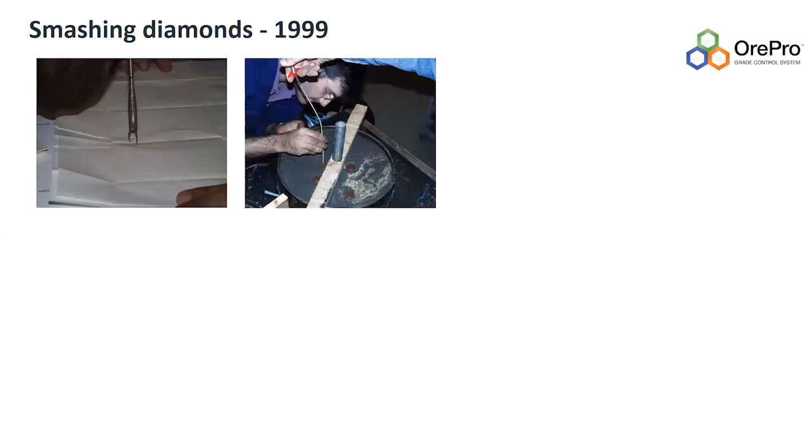Some of the interesting things we did here: in 1999, we had a diamond damage project with De Beers, where basically we took 24, I think they're 1 carat, half a carat diamonds, gem grade diamonds, and we stuck them in concrete. There's Gideon doing some work. We put the concrete in drums with a little explosive charge, and we were supposed to get nice shock waves to see whether or not the diamonds would be damaged by the explosives.

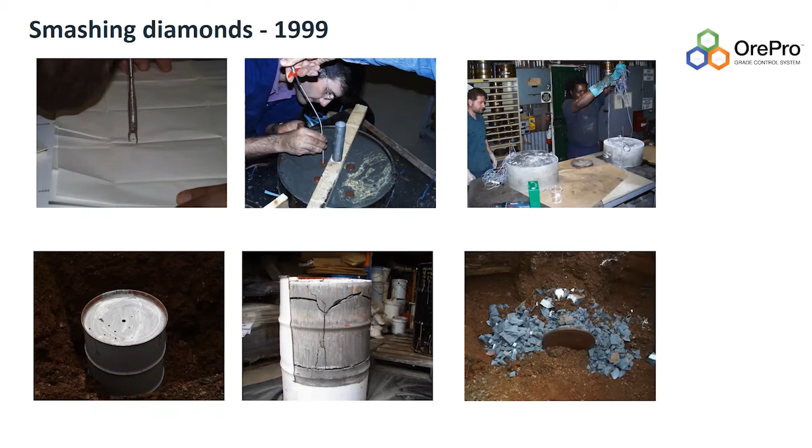Sometimes the drums didn't behave, and so we had to dig through and find them. And luckily, we didn't lose any of the diamonds. We were told in no uncertain terms not to lose any, so that was quite nerve-wracking. And that's basically what we ended up with. So we had diamonds that sometimes survived, other times we never cracked them, but we got a number that just shattered internally.

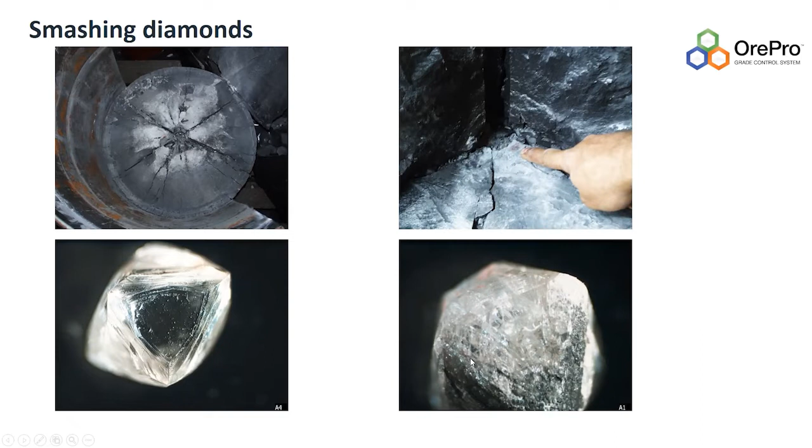So the start of the grade control journey for me was in the late 90s. There was a growing awareness in the industry that something wasn't right, that what people knew was in the ground wasn't manifesting itself at the end of the concentrator. So there was lots of work done globally.

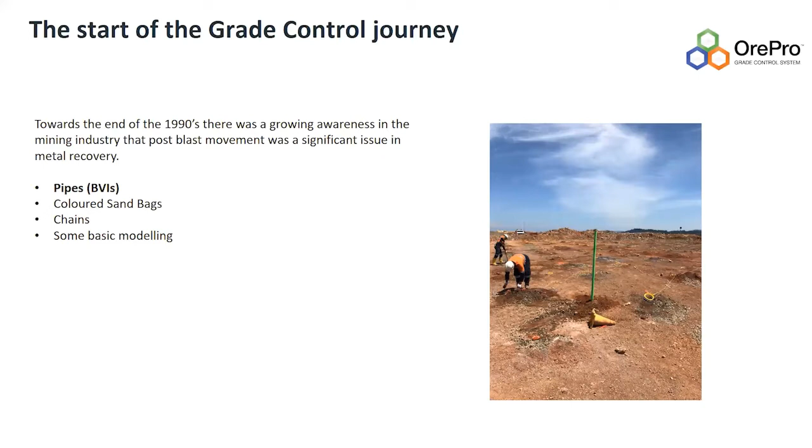Using pipes and coloured sandbags and chains and some basic modelling. At the end, it came back to blast vector indicators, BVIs, which are polypipes, which have issues in recovery and also accuracy. You end up with a 3-metre pole where on that point is the end point of your vector.

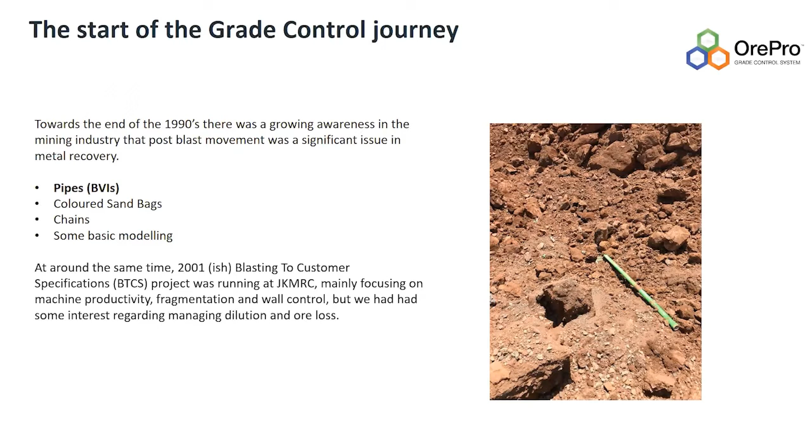At the same time, we had a project in the mining group, blasting to customer specifications, BTCS, and that was mainly focused on machine productivity and fragmentation and wall control. But there was interest in trying to tackle this dilution and ore loss issue that was plaguing the industry. So the light bulb moment was in April 2001.

Darren Thornton, who was working here at the time, showed me this paper where the Mackay School of Mines in Reno were doing some work where they had magnets in the ground. Pre-blast, they would go with a cesium vapor gradiometer, it's a magnetic detector, and pick up the vertical component of the magnetic field. So you end up with these little volcanoes of magnetic field. So that shows you where the magnets were pre-blast.

And if you remember your high school magnetic theory, there's a dipole, and so that's all good. But then post-blast, you get something that looks like that. So what's happened? Obviously, with the blast, the magnets are rolled, and the magnetic field isn't always pointing vertically. So that night, I went home and I pondered it, and the next day I came back. I remember it fairly clearly. It's quite surprising. I said, what if we gimbaled that magnetic field so that the magnetic field was always vertical?

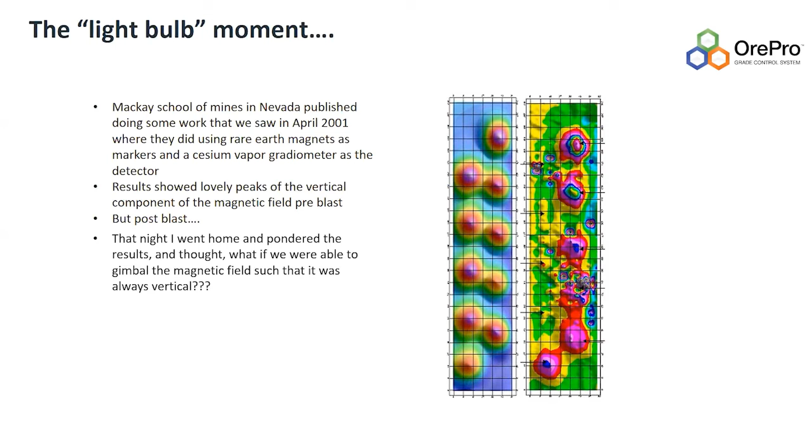So the JK Skunkworks kicked in down there, and that was Michael Wortley, Graham Sheridan, myself, Peter Holtham, and also Darren Thornton. And we kicked in, we built a prototype.

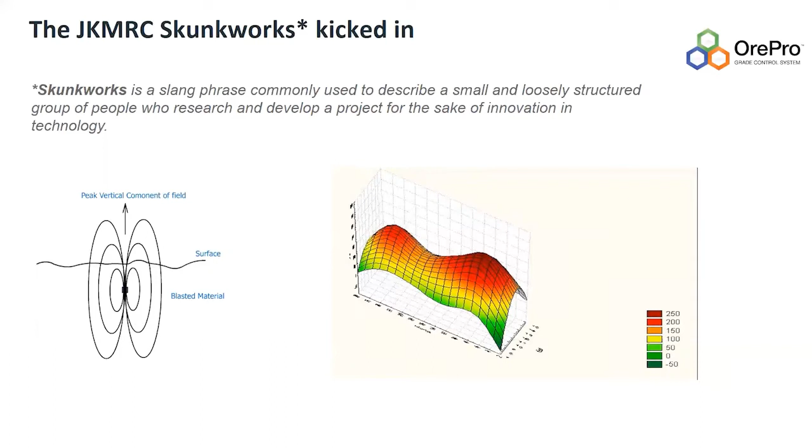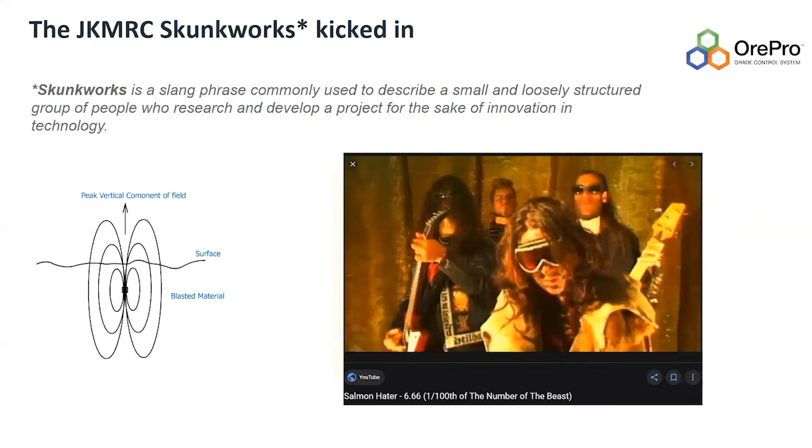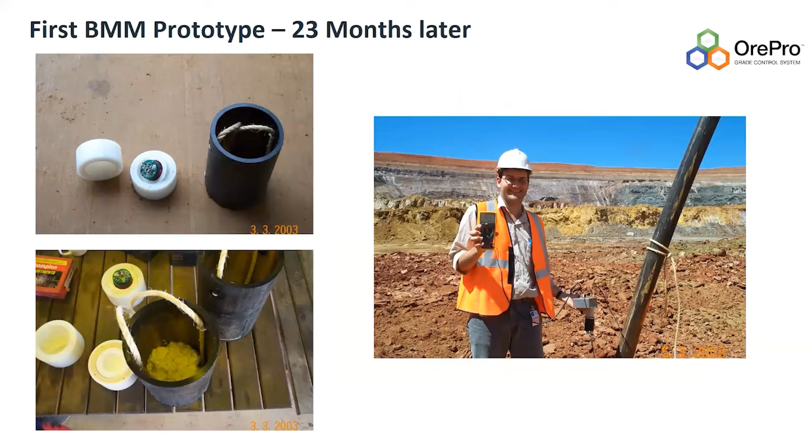So 23 months later, we came up with this prototype. This is at Sunrise Dam, and there's me with a big grin on my face when the two survived. Nick, who's here, he machined the first housings. There's a little polystyrene ball there that I bought from Spotlight, and we sort of MacGyvered it all together. But they worked, and we found them post-blast and created these vectors. And the rest is history for BMT.

So 250,000 of the balls have been used around the globe, and they're pretty well known throughout the mining industry in grade control space. So as Nathan said, I'd forgotten I'd given you all that. I then subsequently left, went to Metso Process Technology for 7 years, did lots of mine-to-mill stuff, developed smart tags, which are RFID tags, again, tracking ore post-blast through the concentrator. Did some vision systems and acoustic systems.

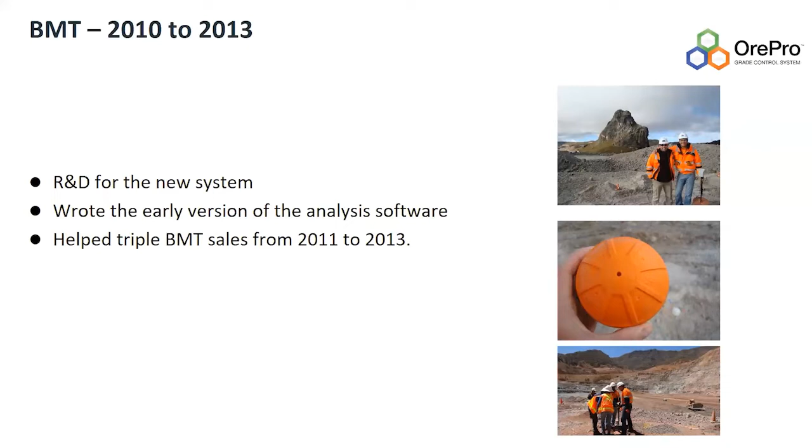Then went back to BMT, which was growing then. So I spent 3 years at BMT doing R&D. I wrote the early version of the analysis software. Some would say in an ad hoc fashion, but it was fit for purpose. And actually in 2012, we won the I Awards, both in Queensland and nationally, for the industrial design of software. So that was pretty cool. And we also tripled the BMT sales in that period. I then went back to Metso, as you do, and did some more stuff.

That imploded in 2015, and so then I ended up at CRC, where that's my day job, doing blast modelling in the grade engineering space for induced and natural deportment. Also looking at mine-to-mill studies and using the capabilities of the integrated extraction simulator with the blast fragmentation model, and also doing some data analytics to look at correlations between the sensors that we're evaluating and the origins of the ore, again, looking at ore tracking.

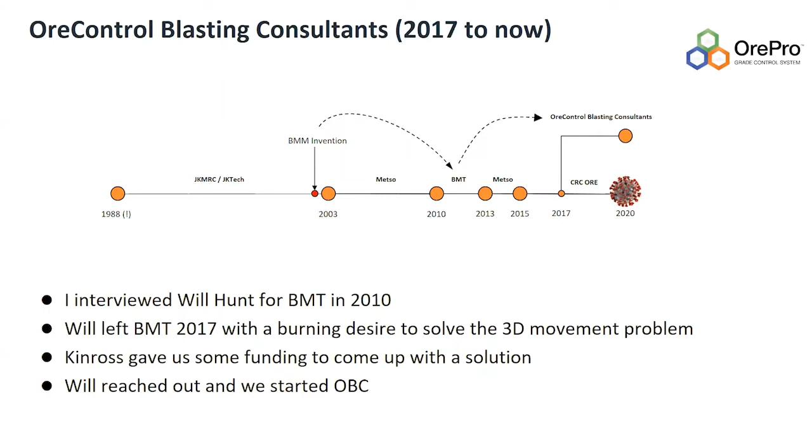In 2017, sorry, I'll step back a bit. So in 2010, I interviewed Will Hunt, who's my co-owner of OBC, and he started at BMT, and then I left. And Will left BMT in 2017 with this understanding that there's a 3D issue in grade control and with a burning desire to sort of solve it. He had got some funding from Kinross, and he reached out to me, and I checked it with CRC, and we started OBC.

So yeah, Will's a mining engineer. He's based in Denver. He's done a lot of consulting around the globe. Our CTO is Jeff, very clever software engineer. Had nothing to do with mining, which is probably a good thing.

And yeah, has done a fantastic job with what I'm about to show you. So let's go back to grade control. So grade control 101. So you have a blast block. You do lots of assays and blast hole sampling. You do some magic geostatistics, and you create a grade control model. And that's used to classify ore and waste, and uses the grade, the geochemistry, lithology, etc.

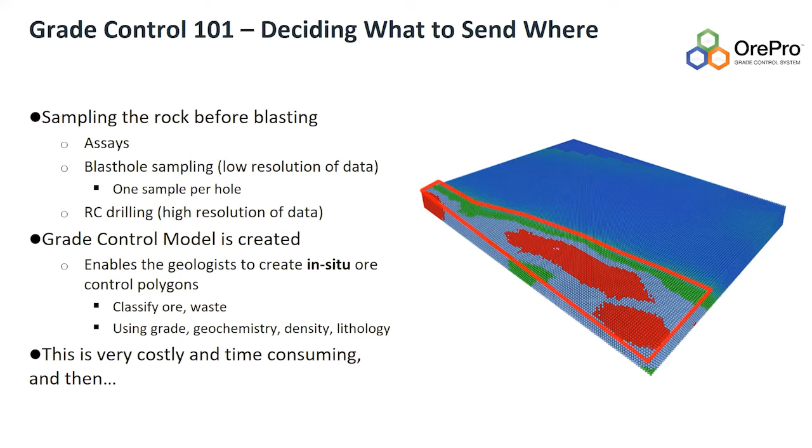This costs a lot of money. It's very costly and time consuming. And then we do this. We blast it, obviously, to excavate and process it. So if we look at this blast here, these are pre-splits, so it creates a crack along the high wall there, just to protect it from damage. It doesn't really contribute to movement at all. This blast is going to initiate here and fire in a V shape.

Drones have made our life much more interesting, and allow us to see things that we couldn't see before. So there you can see some fly rock coming to try to take us out. It doesn't, but if we go back, we can see the rock at the front kicking out, like so. So we go down to the ground now and look at this blast, and we look at this for scale. This is a 10-meter blast. You can see these two guys here, the scale. So, you know, it's a lot of movement.

A big power trough, or we call it power trough, at the back of the blast, big heave here. So ore has gone from here to there and kicked out there. And so when you're looking at mitigating for blast movement, obviously things aren't sliding in a nice 2D manner. Stuff is going down and up and everywhere and forward.

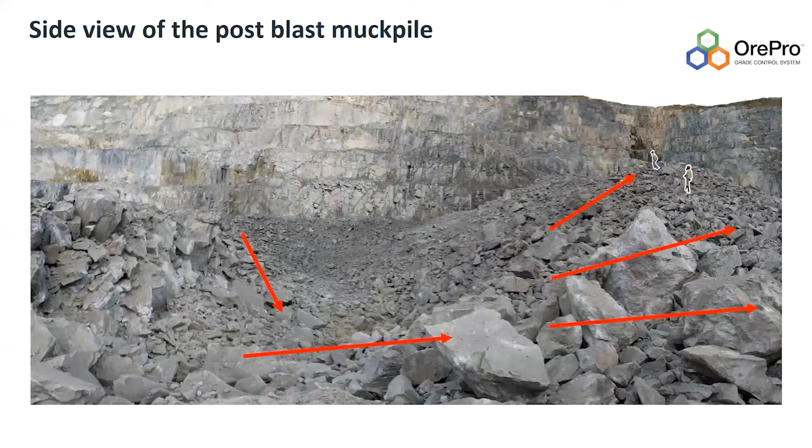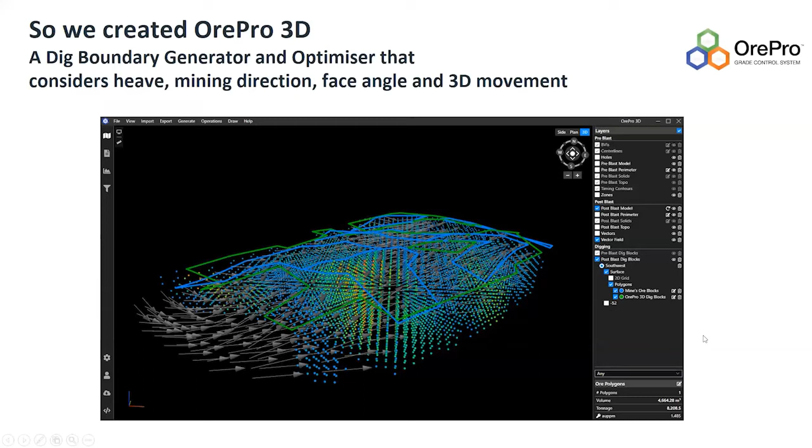So we created OrePro. It's a big jump. There was probably 18 months of software development there. And it does two things very well. It creates dig line boundaries to your specifications. So grade and minimum mining unit, which depends on the size of the equipment, mining direction, face angle, and of course the 3D movement. So we end up with, every time, it takes billions of calculations, the optimized polygons to capture the metal that you want.

So this is an example of comparing our polygons with hand-drawn ones. We gave this as an exercise to 4 geos. And you can see here, if we look at the dollar net, which is the metal minus the processing cost, you can see the great variation between the four geologists, and in terms of dollars difference between our polygons and the worst case is $96,000, and our polygon and the best one it's whatever, $70,000.

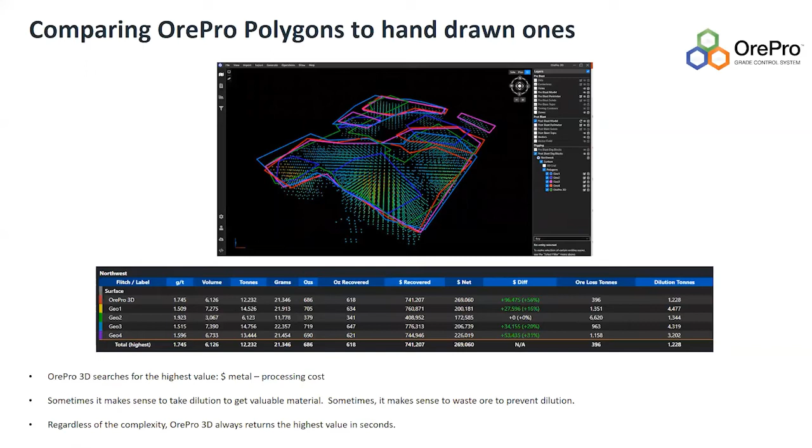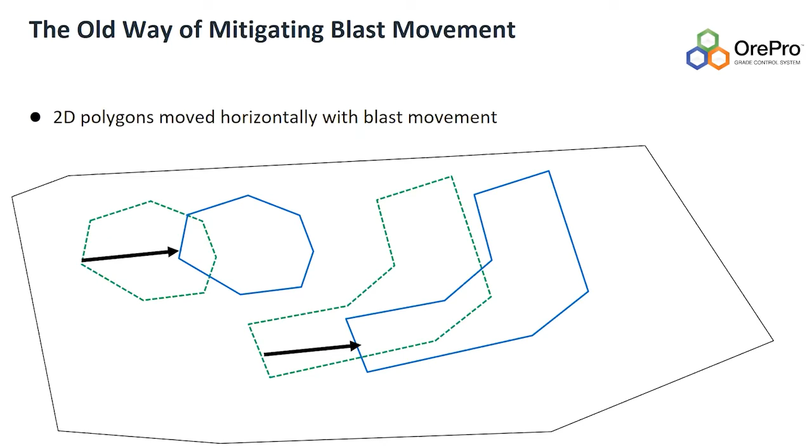So sometimes it makes sense to take dilution, which is rock which has got no metal in it. Other times you have to wear a bit of ore loss to get your maximum recovery. Regardless of that complexity, the system always gets the highest value every time. So once we've got our perfect polygons, what do we do with them to take blast movement into account? So the old way of mitigating for blast movement was to basically slide them horizontally. And I'll show you what that looks like in a moment.

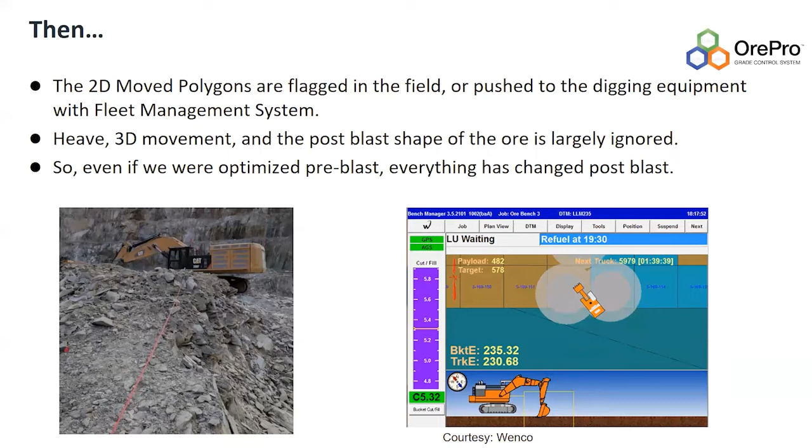So we take those 2D polygons and then we flag them in the field, and we push them to the digging equipment. But heave, which is how the blast swells, 3D movement and the shape of that post-blast muck pile is largely ignored. So even if everything was perfectly optimized pre-blast, everything has changed post-blast. So we look at a case study.

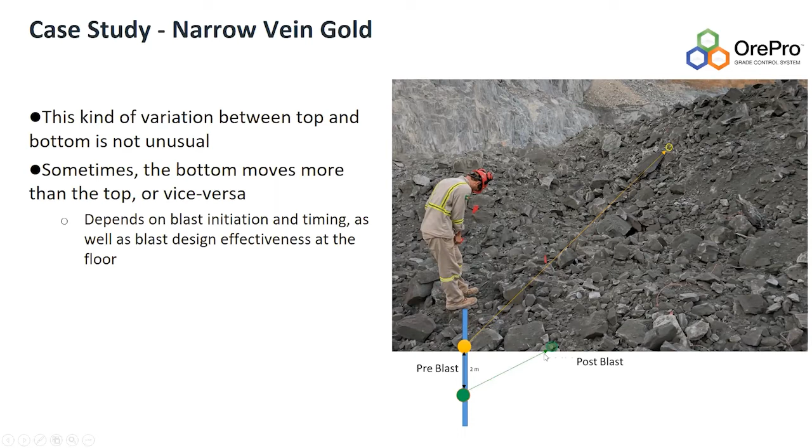So when this guy was standing, there were 2 blast movement monitors, BMMs, below him, and the top one, which is probably about 2 meters below his feet, moved all the way to there, and the bottom one moved to here. So sometimes the top one moves more, sometimes the top one moves less. It depends on the face conditions.

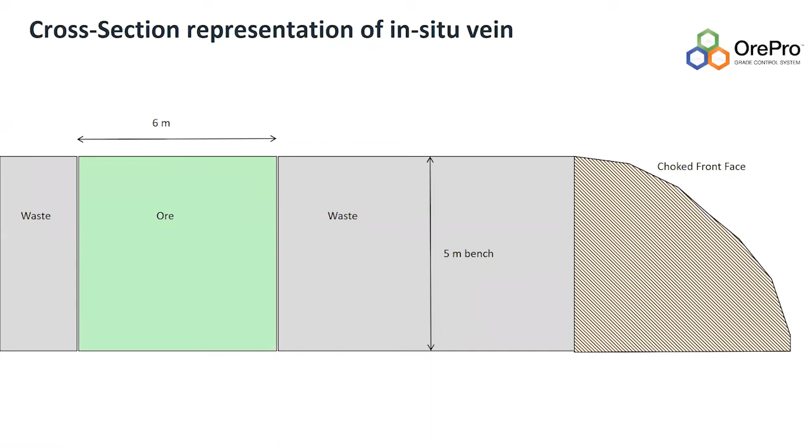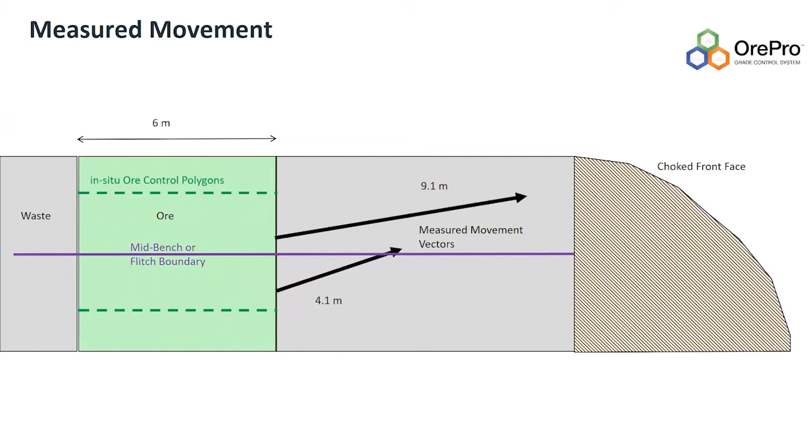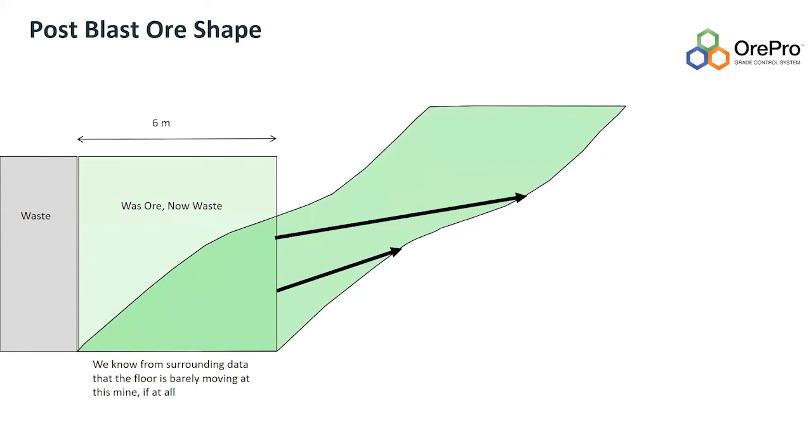So the ore body post-blast looks like so. It's been smeared across towards the free face, which was choked in this case. And we also know from surrounding data that the floor of this blast has hardly moved. So previously you would move the pre-blast polygons across and project them to the surface.

And then the shovel, if it digs from this direction, from the right-hand side of the screen, we end up with this material here being lost, because the shovel is going to dig up to this line here, taking the mining angle into account. This is going to be sent to the waste dump. It will then keep digging until it gets to here.

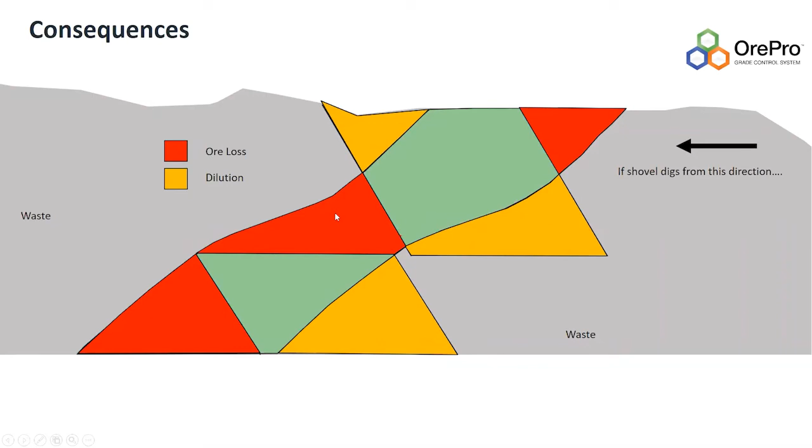This yellow material will then be dilution. So that's material which has got no economic value, which will get sent to the processing plant. And then this material here will be lost again because it's sent to the waste dump. So what if we dig from the other direction? We get a similar sort of scenario.

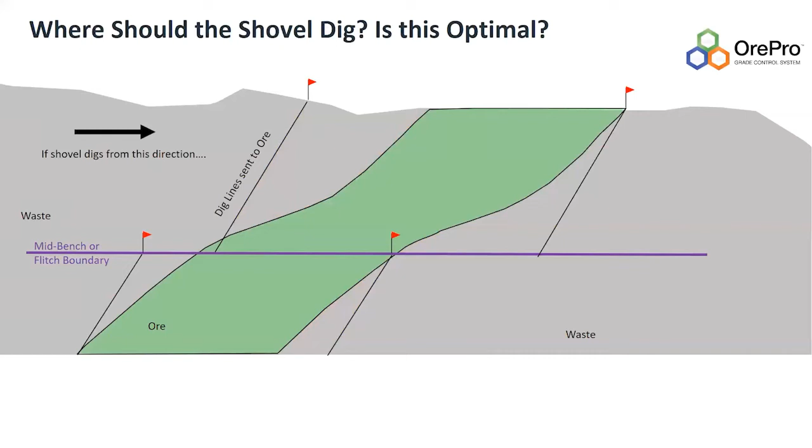So do we widen the dig lines so that we eat lots of dilution? We get all the metal, but we also take a lot of uneconomic material. Or do we narrow it so that we minimize our dilution, but still lose this material here?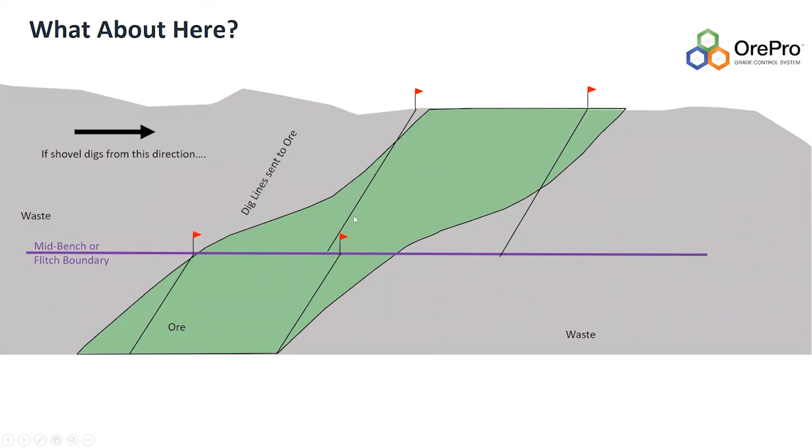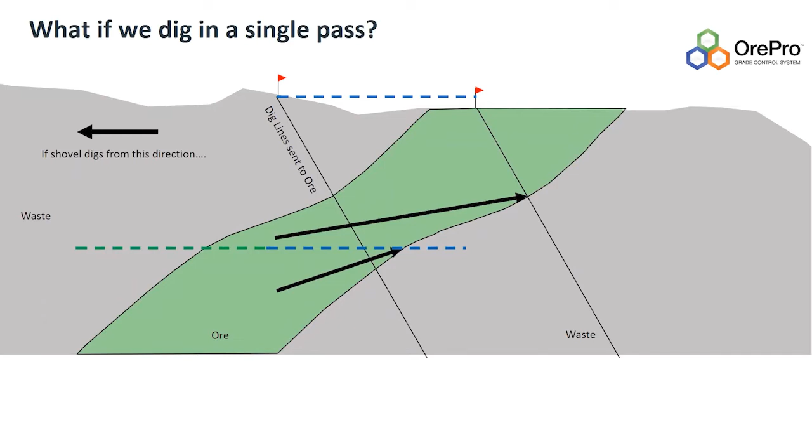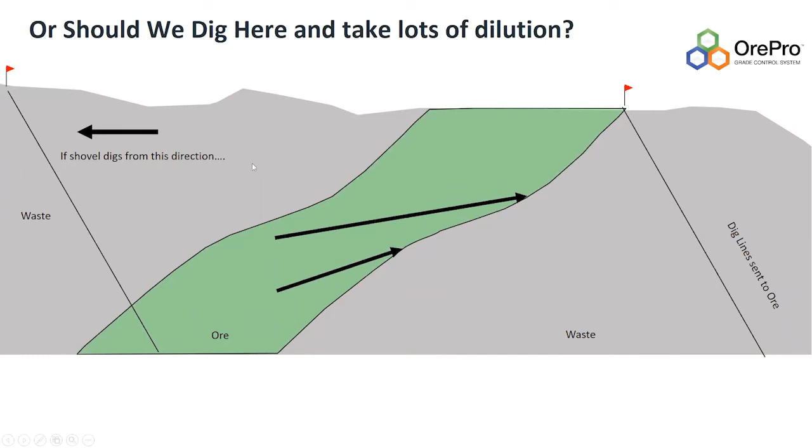What if we dig in a single pass? What if this isn't a multi-flitch? You've got big equipment and you have to dig it in one pass. You end up with, going back to that, where do you draw the line? No pun intended. If you widen it, you end up with all this dilution here. What if you go the different direction? So there's a lot of scenarios to consider.

So the bottom line is that a human sitting in an office, a human, full stop, can't do these calculations in their head. There's billions of calculations and conditions which need to be taken into consideration, and neither can a 2D optimizer. So the solution must take 3D blast-induced movement into account, and dig direction, face angle, and the height of the flitch into account.

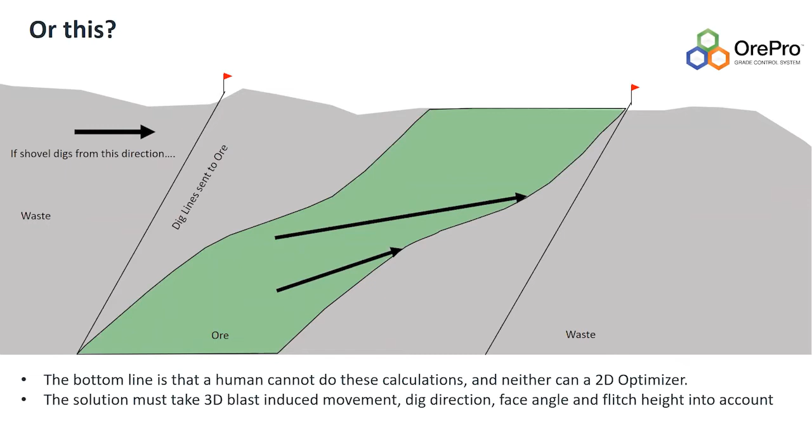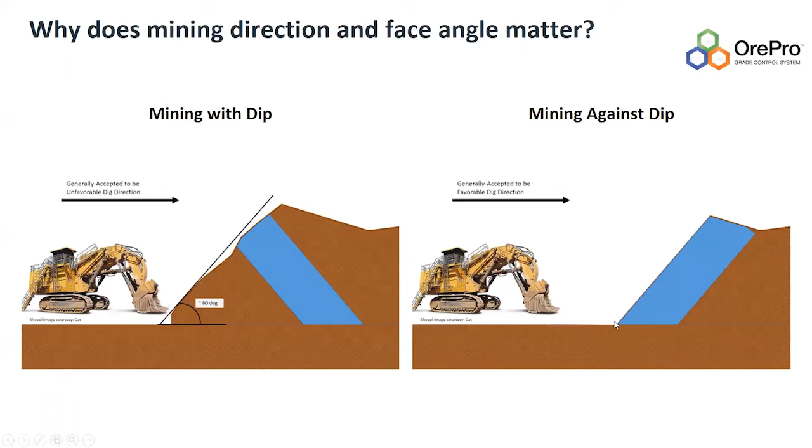So why does mining direction and face angle matter? So this is an extreme case. Obviously, if you're going to dig in this left-hand case scenario, you're going to move through here and get lots of dilution. In the second case, because everything lines up, you can clean that face of that vein and be much more targeted with how you recover that vein.

So the solution that we've developed has got 3 inputs. Obviously there's the in-situ grade control model. We take the blast design, and usually we want the timing contours, and that gives us a good indication of how the rock moves. Measured vectors, if they exist, and if they don't, we've worked on a system we call SmartVectors, which predict the movement based on blast design and the final post-blast surface. So we need the post-blast surface, which constrains the material to a known outcome.

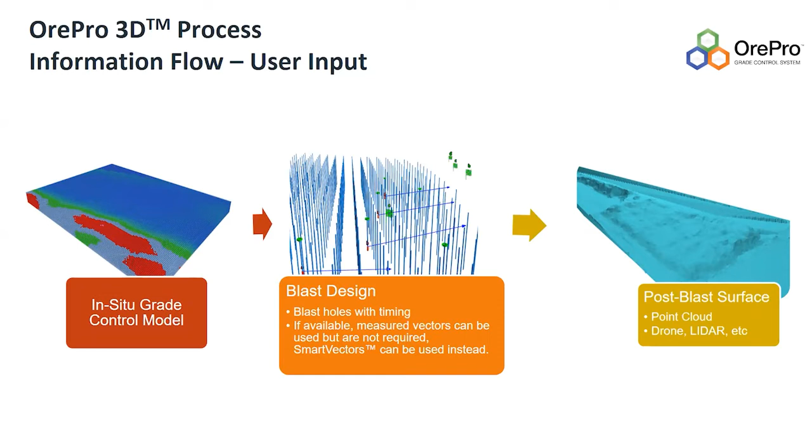With those 3 inputs, which are fairly easy to get, I mean, the post-blast surface, people used to complain about it, but with the advent of drones, within an hour you can get a really high resolution 3-dimensional scan of your post-blast surface. So what we create is a reactive model. It's not a predictive model, it's a reactive model. So we take the blast design and the post-blast surface, and we say, okay, we knew where everything started, and we now know the shape of how everything ended. So we can join the dots in between the two and create this model.

So it's not a physics-based model. We've tried a couple of them, Connie. And whilst they give you a good general idea of what the muck piles are going to look like, so far, for day-to-day grade control, we haven't seen them to be accurate enough or useful enough. I'm sure with the right people that we'll get there.

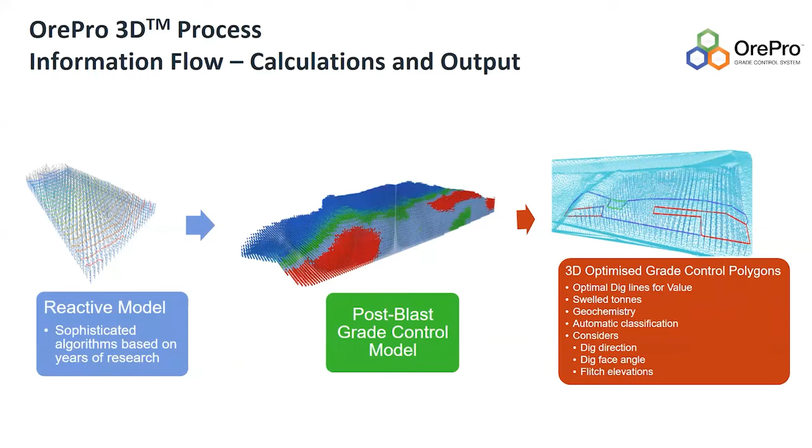And it doesn't have to be as simple as a cutoff grade of 0.8 grams per ton. We can also do really complicated decision trees, where you can do sub-classifications. Jeff's coded this up. As I said, he was quite clever, and this is quite a special thing. So we can use these decision trees to say where material is going to go. It's all about decisions. It's not just a decision to send something to the waste dump or to the concentrator. There's multiple stockpiles, and is something acid generating? Should it go to the leach pad, etc.

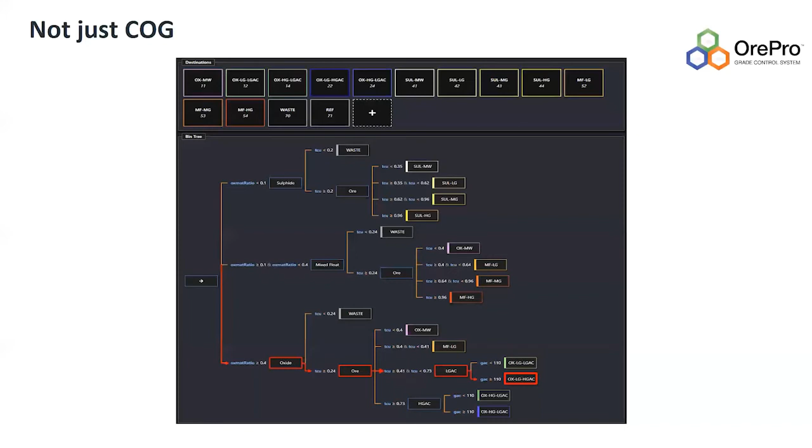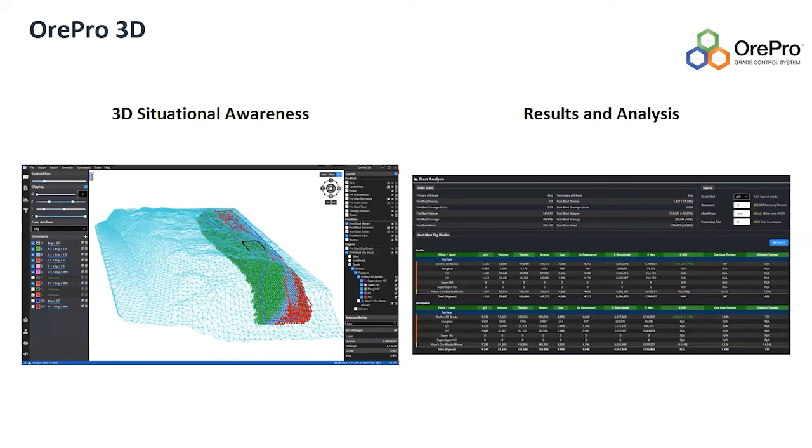Just some screen grabs, which give you 3D situational awareness, so you can look and see how things all fit together. And we do financial analyses to compare what we have generated with what the mine might have generated, either hand-drawn polygons or generated by another package.

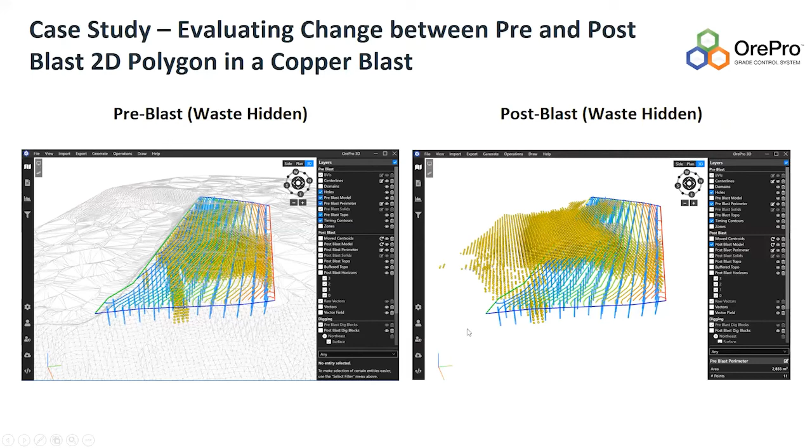So we look at a case study. This is real. Here on the left we've got a blast with the waste hidden. It's a copper blast, and this is post-blast. So you can see the change in shape of the ore body in the model. And if we look at this sort of vein which is sticking out here, you can see it's moved from here to there, like so. So it's moved, it's been translated.

So if we take the 2D translated polygon and process it, in this case we actually did a campaign with it. The mine more or less thought, with that 2D translation, that the contents of that polygon were the same pre and post blast. But we know that it's not. So we campaigned that polygon in the mine, and then we looked at what we got in terms of the copper at the concentrator, and also some other variables.

You can see here that the density has changed quite significantly from 2.8 tons per meter cube to 1.6 tons per meter cube. And that's because everything swells. Once you blast it, you get the swell factor, so the bulk density drops. When we campaigned it, the feed grade to the mill was recorded at 0.5%, which aligns more or less to what we had predicted.

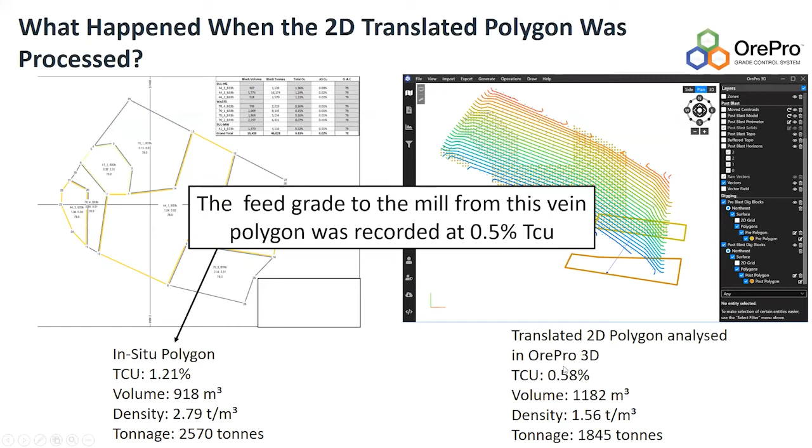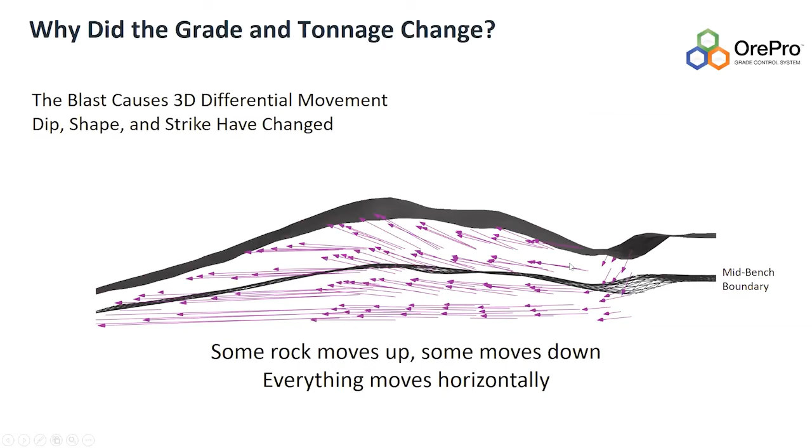And why do they change? Well, because some rock moves up, some rock moves down. This is a slice through that blast. The mid bench boundary, you can see how that changes. So everything moves horizontally towards the free face, but there's obviously a lot of movement, so that needs to be taken into account.

Kinross, who were our initial sponsors of the software, did a 3-month trial where they paid for OrePro's development. So they took 3 months of our polygons and campaigned them through the mill, and then also did a back calculation to see what would have happened if they used their old 2D methodology. And they were experiencing a lot of variation, up to 17% variation in the reconciliation. After the 3-month trial, we got numbers which were within 1%. So we're obviously doing something right here.

If they'd processed the ore using the previous 2D blast mitigation process, they would have been out by 15%. So quite a significant difference here, 11% difference in ounces. Convert that into dollars, and you can see why this is a big deal. So the story is we need to accept that the ore body changes shape, and not try to connect the pre-blast to the post-blast. The post-blast is new.

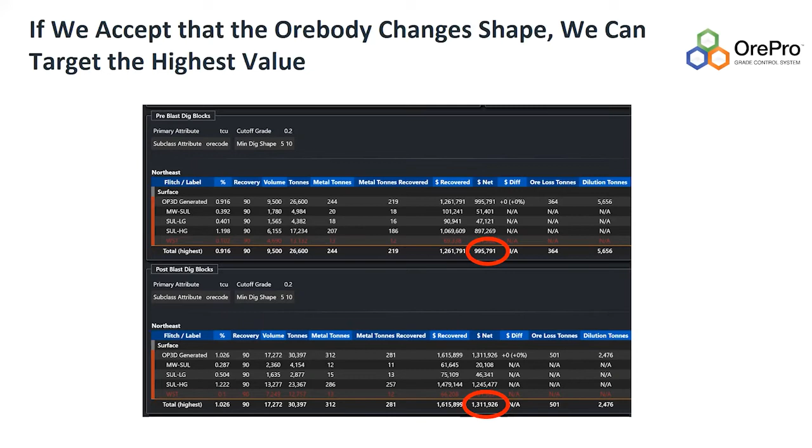Another case study, a structurally controlled gold mine, which you'd think is fairly straightforward, 10-meter bench. Here we're looking at different dig directions: digging to the south and digging to the west. The difference between what we had generated and the 2D movement was between $120,000 and $266,000, depending on the direction that you dug. And between our polygons it's $225,000 in mining direction. So very significant numbers, and these are for single blasts. Multiply that by a couple of blasts per week, and the dollars do add up.

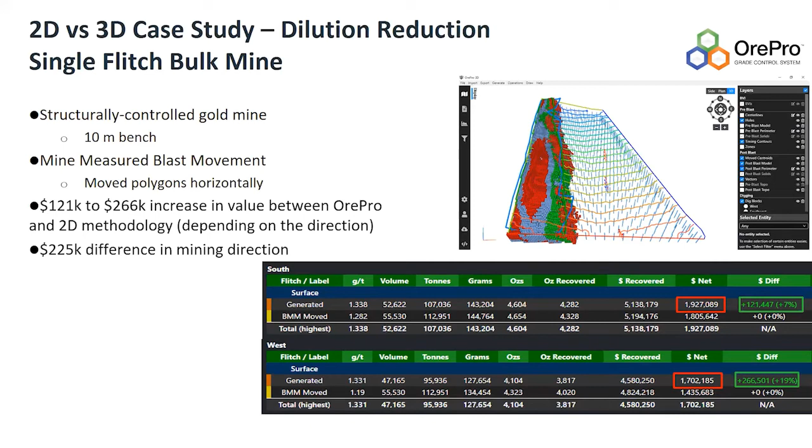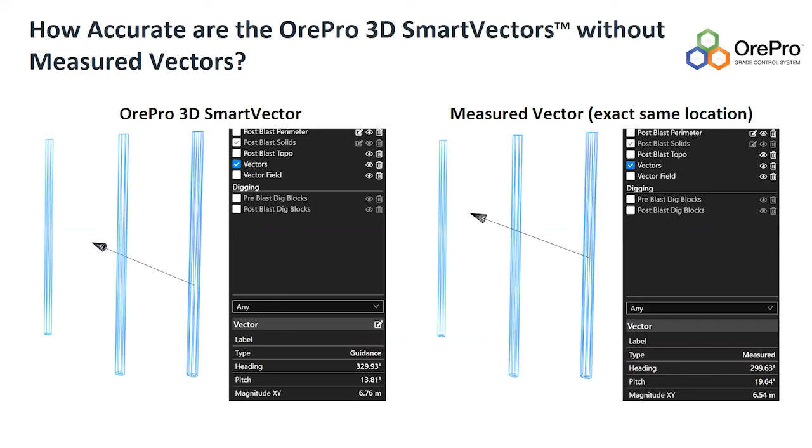So obviously, sometimes if you're in high powder factor blasts in chaotic regions, sometimes you do need to take these measurements. But we've seen that the smart vectors are holding up pretty well.

Where are we going? I'm going really fast. Where are we now? So we've got 30 clients around the globe, and that's been in the last 18 months or so. And we've recently partnered with Seequent, who are a New Zealand software company who do Leapfrog. And it's actually very good timing because we joined up with them pre-pandemic, and they have 15 offices around the globe. So that gives us footholds in regions that we couldn't reach otherwise. So that's been quite successful.

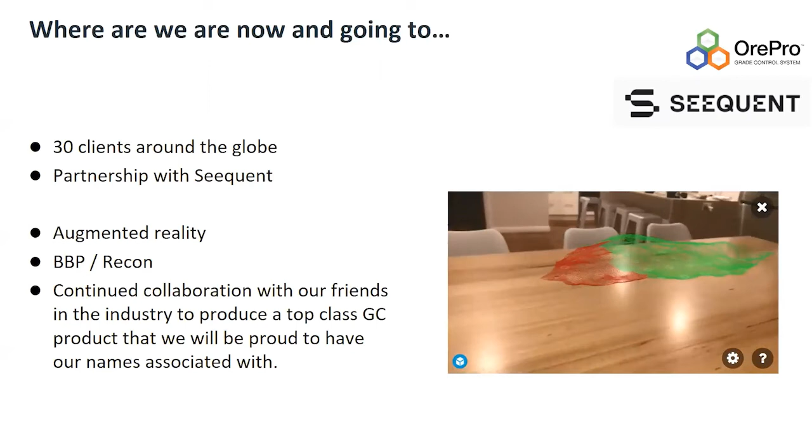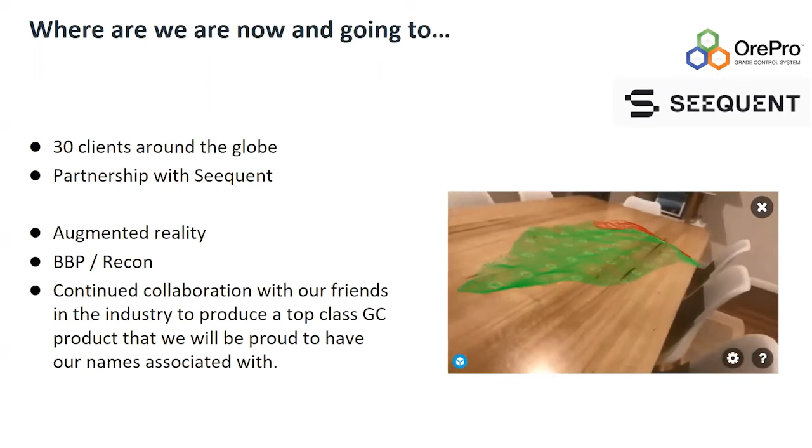We're looking at augmented reality. That's on my kitchen table, obviously. We would like to take that out into the real world. We're working on a product called BBP, which is Bench Blast Planner, which will allow you to look forward and get a bench worth of data and predict or evaluate what's the best direction to attack the next bench. So that will take a bit of modeling skills, but we are working on that. It's really just to give you an idea. Should we attack this bench from the north or from the west?

And also recon. So we would like to implement some reconciliation capabilities to actually track how we're performing. And of course, continued collaboration with our friends in industry. That has driven a lot of our innovation, getting feedback from our clients. And we know most of our clients personally. And yeah, we just want to develop a top class grade control product that we'd be proud to call our own.

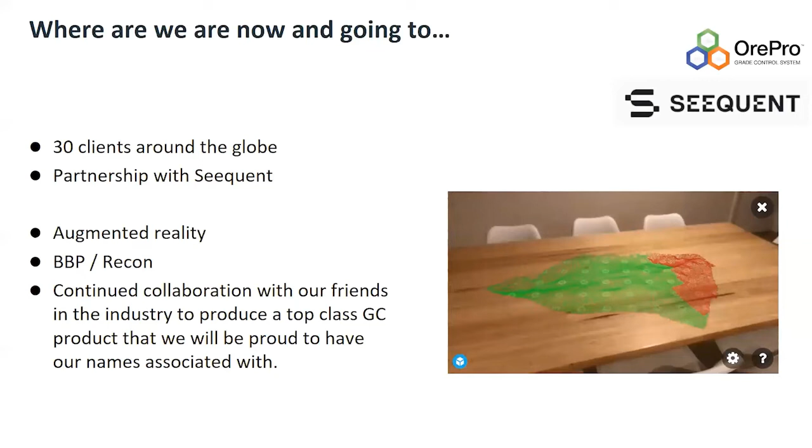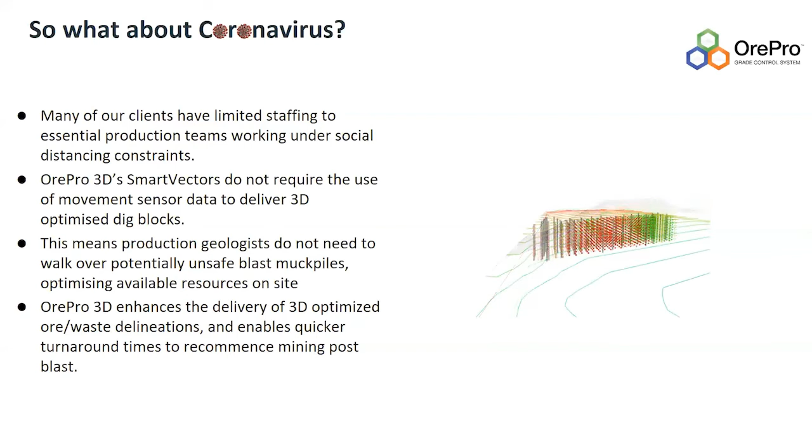So what about coronavirus? What's the tenuous link between grade control and coronavirus? Many of our clients are actually experiencing limited staffing due to social distancing constraints. So either people aren't able to get to sites or they're socially distancing on the muck piles. So OrePro has allowed them to turn around their grade control processes much quicker, without infringing on these social distancing limitations. So between getting the postblast scan, which is about an hour with the drone, and the software delivering those polygons, we can probably do that in 10 minutes. So it's quite a quick turnaround.

In addition, the lockdowns have imposed a new reality on us. Will, in particular, had spent a lot of time on planes, flying to the middle of Africa for a 3-day course and then coming back. So it's made us have a good hard look at ourselves and at how we can tackle training. So we've concentrated on a lot of remote training packages. Not just static material like PowerPoints, we've also developed a learning platform which allows our clients with really poor internet connections, which a lot of our clients have, to download our training material and store it temporarily in our platform, protecting our IP as well. This is our livelihood, so we want to protect it. So yeah, this has given us an opportunity to develop these tools.

I thought I was going to go over time, but I haven't. So my takeaways: as Nathan said at the beginning, there's always potential to innovate and improve something. If we thought that the sensors we developed 17 years ago were it, we solved grade control, then we would have gone and done something else. But there's always room to improve something. Look at Apple. Don't look at Nokia, but look at Apple. Find clever people to work with. Don't think you're the cleverest person in the room. There's lots of clever people around, and everyone's got a different point of view and different angle on things.